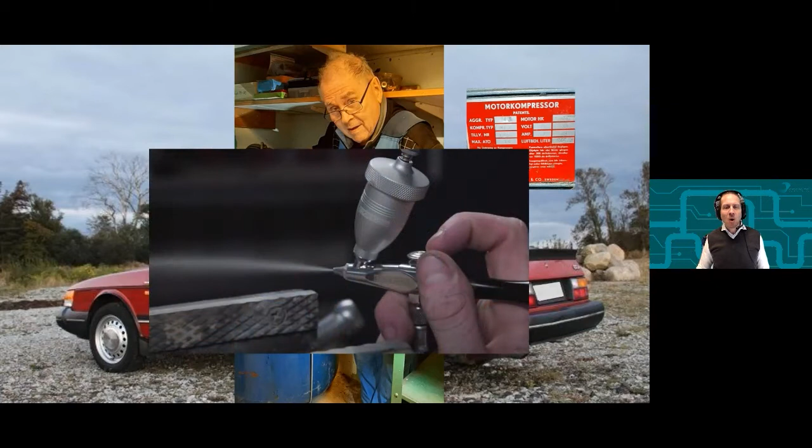My first close-up experience with a compressed air system was when our old Saab got a rust spot on one door. My crafty father-in-law happens to be an expert car mechanic, and in his garage he had a large compressor with a buffer tank that originated from a cement factory. The compressor looks dangerous and is driven by a powerful 3-phase motor that makes a terrible noise. I was amazed. Why use such a large and noisy machine for sandblasting and painting?

Running the compressor uses a lot of electrical energy. However, and this is one of the reasons why we see so many applications of compressed air, it enables using small and light tools with high precision and power.

Before I share some insights into how compressed air can be used, I want to bring you down to the tiniest details, the air molecules. Air in the Earth's atmosphere is a mixture of different gas molecules. I'm sure you've heard that - mostly nitrogen molecules, but 1/5 is actually oxygen. The molecules move around really fast, and they have an average speed of roughly 300 meters per second, about the speed of sound. But they bump into each other all the time.

Let's see what happens when air is compressed. I will use a great online tool by the University of Colorado Boulder. You'll find the link to the tool at the end of this presentation. We start with a container of air - you can imagine the red spheres to be nitrogen molecules and the blue ones oxygen. Now, if I compress the air by making the container smaller, let's see what happens.

You see that the molecules bounce more often, and this means that the pressure is rising. You can see that on the pressure gauge at the top right, which measures pressure in units of atmospheres. We see right now that the pressure is around 171 times the atmospheric pressure.

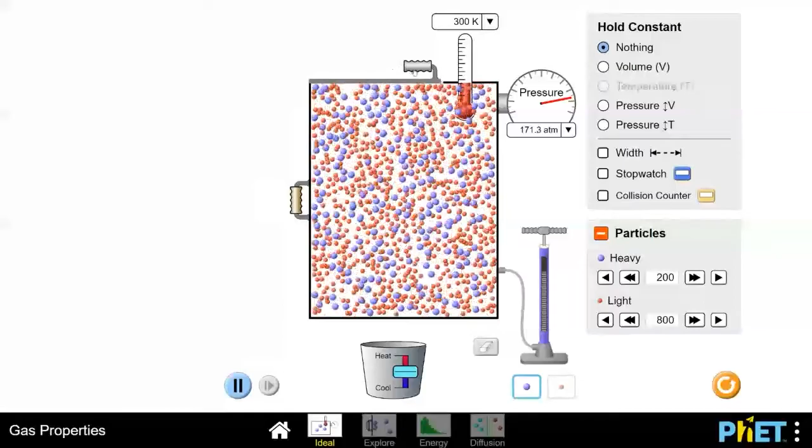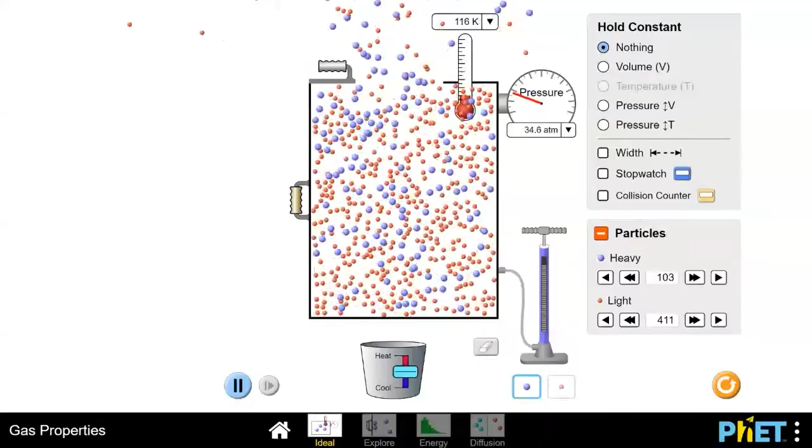If I open the lid now, the molecules eagerly leak out to the surrounding atmosphere. It is this action, the force of the molecules leaving the container, that we use in various applications of compressed air. The force of air is often used to scare people.

Do you remember Arnold Schwarzenegger's popping eyes in the movie Total Recall from 1990 when he was exposed to vacuum in space? Vacuum means that there is no air, so the air pressure is too low for the human body. But of course, even if pictures like this give us nightmares, they are not even close to describing what actually happens.

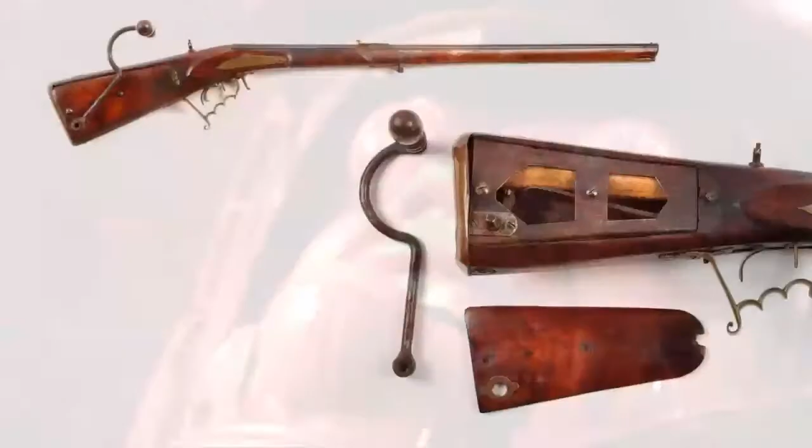However, compressed air can really kill you. The oldest mechanical compressed air gun is from the 16th century and can be seen at the museum Livrustkammaren in Stockholm here in Sweden. The gun easily was the most dangerous gun at that time, shooting darts at a speed of over 100 meters per second. It utilized a bellows mechanism that you can see in the picture here that allowed for very precise action.

So you see, compressed air can be wild, really dangerous, but contained, it can be very strong and useful. And that is why 10% of the electricity consumed by the industry today is used to generate compressed air.

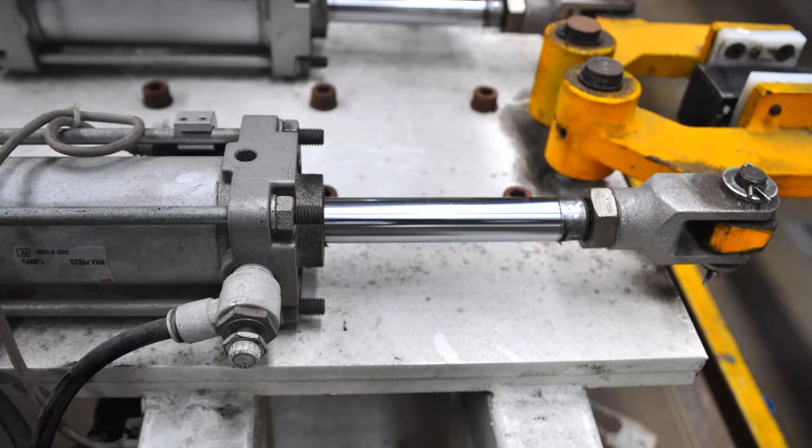Components that operate on compressed air are called pneumatics. Pneumatic cylinders are the muscles of the manufacturing industry, and devices like these can easily lift more than 100 kilograms. Pneumatics can be combined into very complex instrumentation in all kinds of industry.

However, compressed air can also be soft and caring, as in the form of breathing air supplied to people that are seriously ill. Compressed air is saving lives on a daily basis. As you will hear from Bo later, our technical director, the process of generating compressed air, however, is incredibly inefficient.

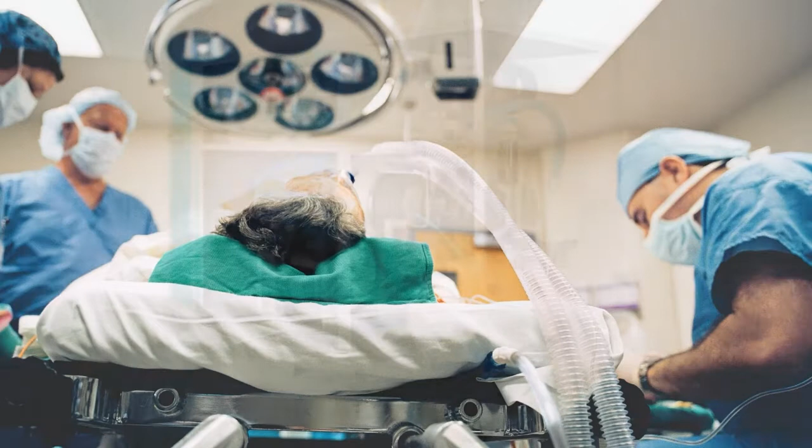So let's look at an industrial compressor. They can take many different shapes, but their basic operation is the same. They take atmospheric air and compress it into pipes that deliver air to the pneumatic machines in the factory.

I said compressing air is inefficient, and the reason is that no matter how we try, we can't compress air without raising the temperature of it. In fact, as much as 85 to 90% of the electrical energy to a compressor is lost through heat. The mechanical energy of the compressed air is only a few percent of the electrical energy that we put into the compressor.

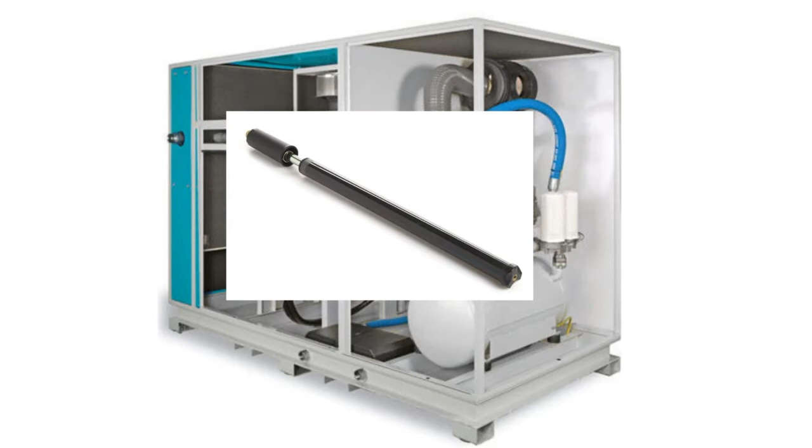Now, if you don't believe me, have you ever tried to use a cycle pump? Have you felt that it becomes hot when you pump? That is the effect I'm talking about.

Compressing air for industrial use can cause it to become several hundred degrees centigrade. And therefore, industrial compressors often have a built-in air cooling to remove some of the heat. But even if the compressed air is cooled inside the compressor, you can usually feel that pipes with compressed air are warm.

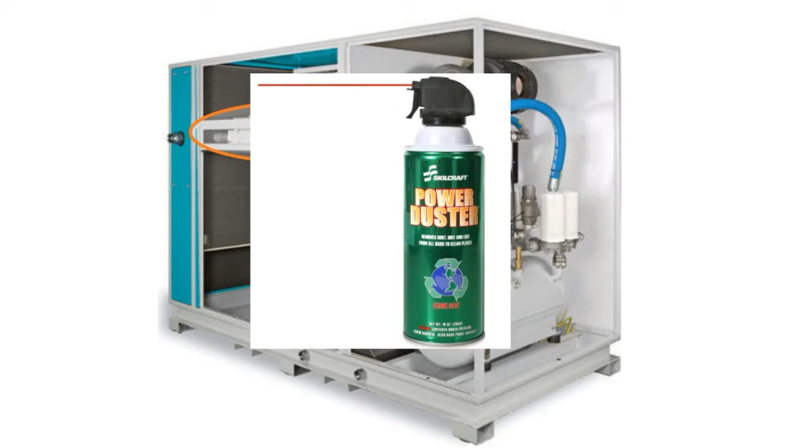Now, what if I have compressed air stored and I open a valve to let it out? Have you ever tried to use a can of compressed air? The temperature at the valve will quickly drop and can become as low as minus 150 degrees centigrade if you expand a lot of air.

So compressing air increases the temperature, expanding air reduces the temperature. And this is the reason why generating compressed air uses so much electrical energy. But still, the benefits of using compressed air wins in many applications.

We have learned that generating compressed air uses a lot of energy, and most of the energy is lost as heat. So using fossil fuel to generate electricity that in turn generates compressed air is one of the reasons why our global industry has such a large carbon footprint.

Now, I want to bring you back in time to look at some usage of compressed air that will blow your mind. Given our society's aim to become more sustainable, I think it's just a matter of time until we see some of these applications revisiting us. Compressed air in itself is sustainable, clean, and powerful.

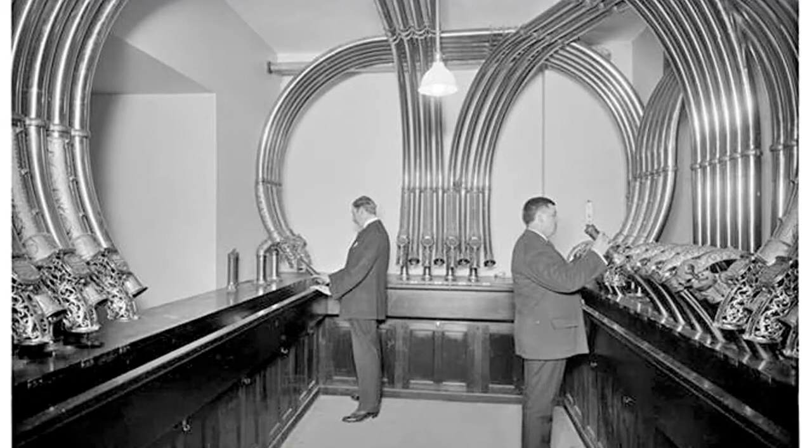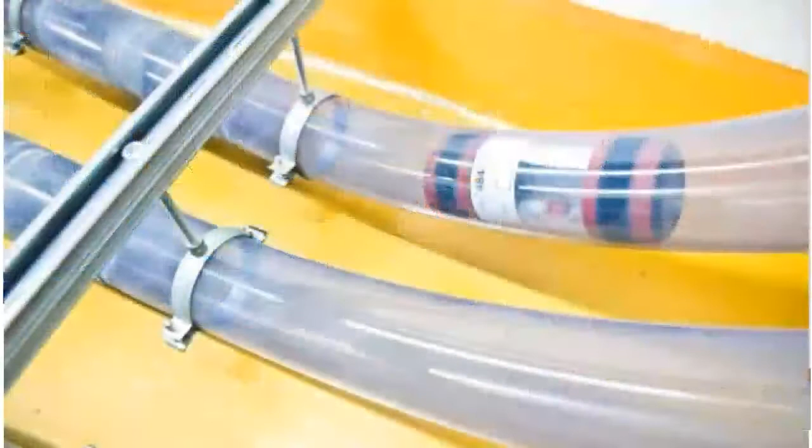The Chambers Encyclopedia from 1896 talks about pneumatic dispatch. What on earth is that? Well, you see these systems in operation today as well, often in hospitals, where they need to send blood and tissue samples with great speed. You simply put what you want to send in a capsule that is inserted into a pipe, and the capsule is pushed by means of compressed air.

Now, can you imagine that back in the 1850s already, Mr. Latimer Clark and Mr. Varley built a system to dispatch messages between the central station and the stock exchange in London? The air was compressed using steam machines, and in 1887, there were compressed air pipes with an aggregated length of 54 kilometers and compressors with a total power of 280 kilowatts used to send a staggering 86,000 dispatches per day.

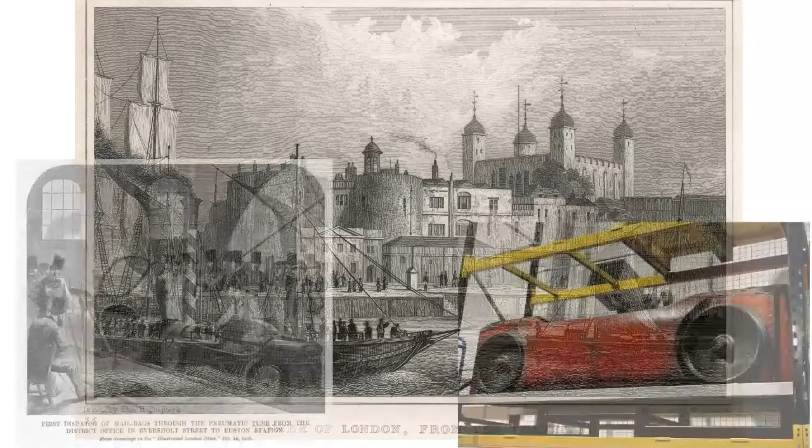In London, even large vessels like these that weighed several tons were sent by means of compressed air.

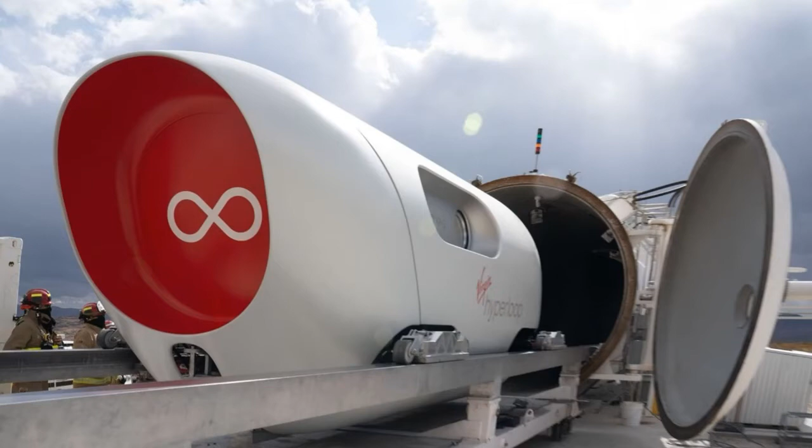And in France, a few years later, a compressed air-driven tram was inaugurated, and it operated for 30 years. They were using up to 94 trams at one time. In Switzerland, by the end of the 19th century, the city of Bern had 10 cars running on a 3-kilometer line, and the compressed air was generated by a compressor driven by water. I call that sustainable and something to think about.

Thank you, Anders. With pleasure. In this next presentation, I would like to talk about facts regarding compressed air, including CO2 emissions from generating compressed air, and the reason why compressed air is so expensive.

The carbon emissions per kilowatt hour of electricity vary from country to country. They depend on the specific fuels used to produce the energy. Countries that use a high percentage of fossil fuels for electricity production will, in general, have a higher level of carbon emissions per unit of electricity produced than those that use more renewable and nuclear energy. But no matter how the power is produced, it is routed through high voltage power lines and substations to the companies that use the power more or less sensibly, including for the production of compressed air.

This is where Enersize comes into the picture. We can often reduce electricity consumption for compressed air production, thus the costs of electricity and maintenance, and ultimately the CO2 footprint. But let's get some facts on the table.

There is a big difference between the countries in the European Union in relation to CO2 emissions, where Iceland and Sweden are at the better end, using geothermal, wind, hydro and nuclear power, but where countries with much greater use of fossil fuels have to deal with emissions in the order of 750 grams CO2 per kilowatt hour, and these data are from 2020.

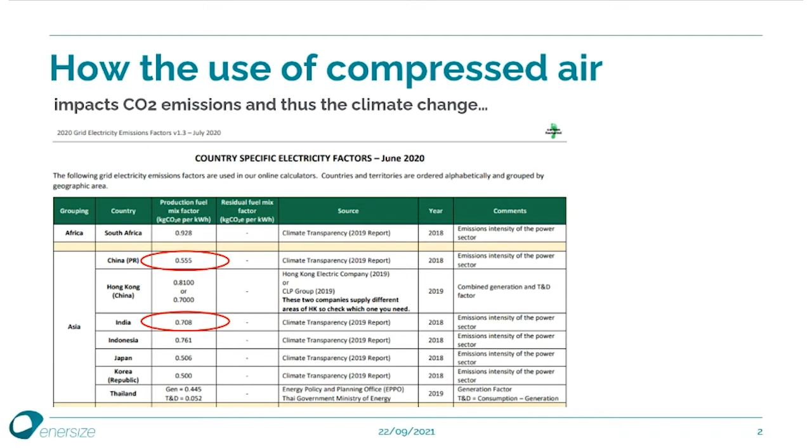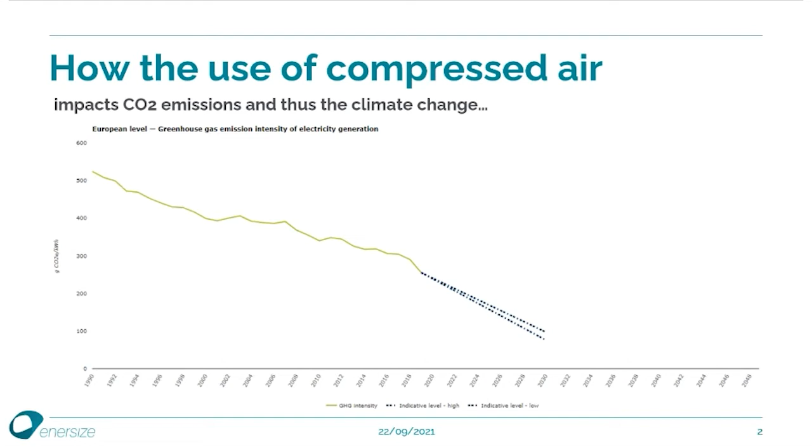In the European Union, CO2 emissions have certainly been declining in recent years, and the plan is to reduce emissions further, but it takes time. Enersize has solutions that can reduce the CO2 emissions here and now, and even with relatively short payback times, often less than a year.

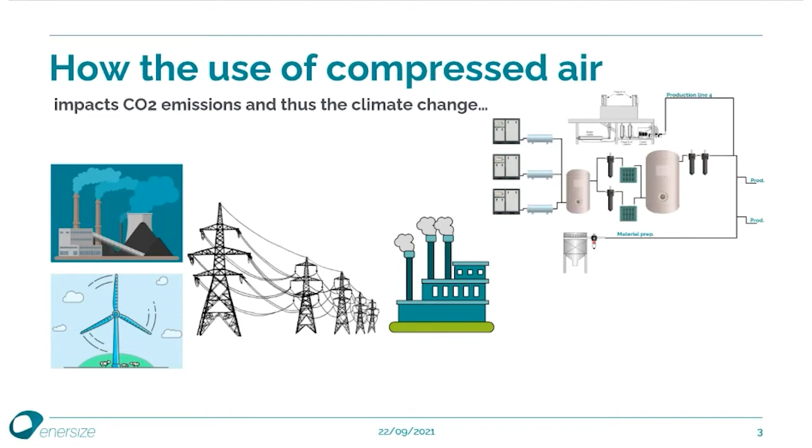Most companies, no matter what they produce, use compressed air to a greater or lesser degree. Most compressors are driven by electrical motors, and in general, it's the most expensive source of energy per unit in many companies. But of course, it has not much to do with CO2 emissions. It has to do with the fact that most of the energy supplied to the compressor turns into heat before we have energy available in the form of compressed air.

In fact, if you consume energy equivalent to 7.5 horsepower, you have 6.5 horsepower available on the compressor element shaft, but you only have about 1 horsepower available in the form of compressed air. The rest of it is heat, which, by the way, can be recovered.

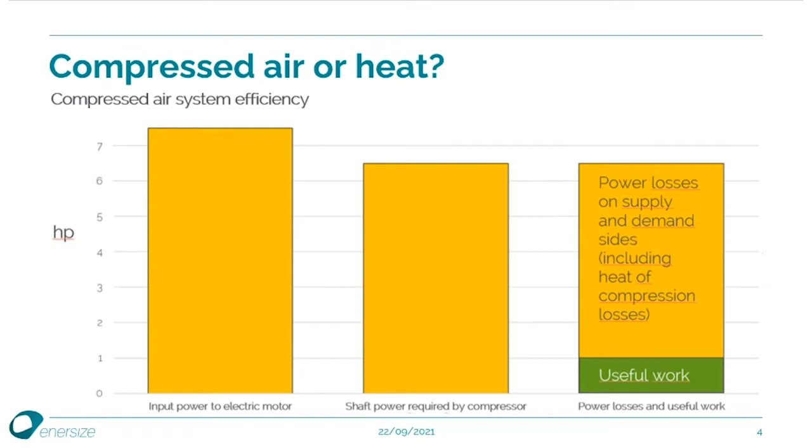But what does compressed air actually cost in terms of energy? Imagine, for example, that we are dealing with 3 compressors from Atlas Copco in the size of 160 kilowatt, where 2 are fixed-speed oil-injected compressors and 1 is oil-injected with VSD, variable speed drive.

This is the technical specifications from Atlas Copco. Allow me to correct a small printing error in the material — it must be kilowatt, not horsepower.

As can be seen, this compressor is available in 3 pressure variants: 7.5, 8.5, and 10 bar. Let's take a closer look at the 160 kilowatt 10 bar compressor. According to the specs, it can deliver 460 liter per second, corresponding to 27.6 meter cube per minute.

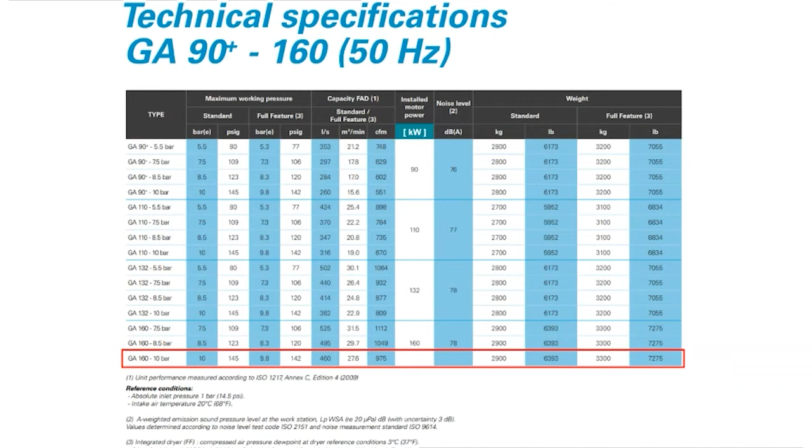But does it only use 160 kilowatt on this? Unfortunately not — this is the nominal power. The reality is that it uses some more power, in fact 178.6 kilowatt, as shown by these test data.

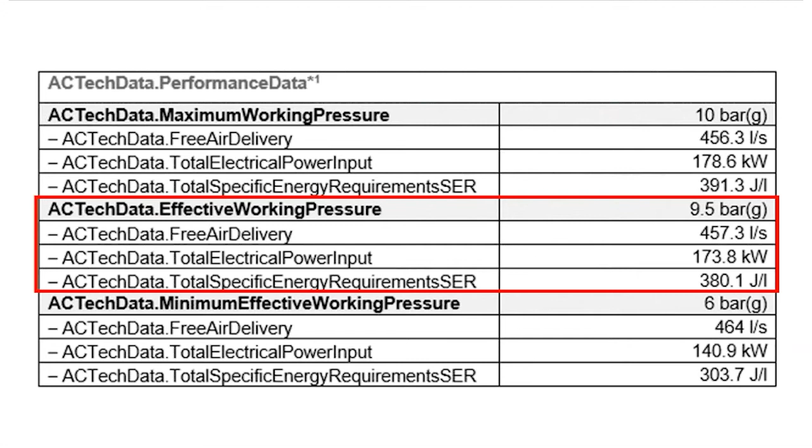But let's take a closer look at these data at, for example, 9.5 bar and pressure test them in our Enersize calculation tool.

This calculation tool uses general thermodynamic rules and thus calculates a so-called isentropic power. I start with ISO 1217, where the reference is 20 degrees Celsius and 101,325 Pascal. Then I insert data from the test data sheet, flow and pressure, and then I adjust the efficiency until I end up with a roughly similar power consumption.

This gives me a performance indicator, key performance indicator 1 and 2, which is the same indicator, just explained in two different ways.

I have similar data for the VSD variant and calculate this in the same way. As can be seen, the efficiency of this compressor is slightly lower.

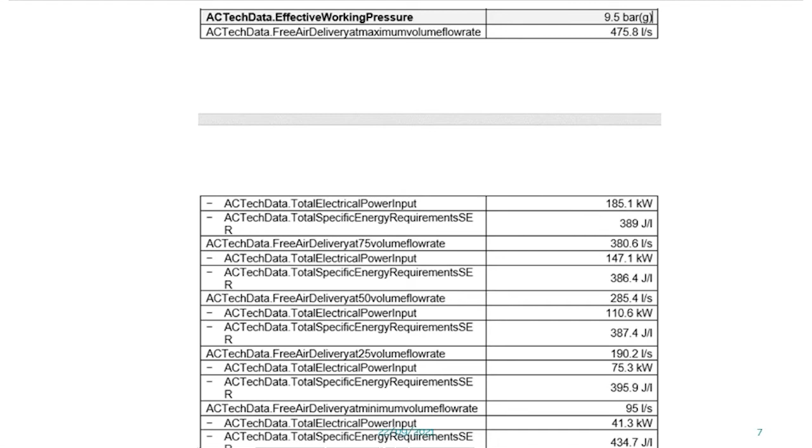This is to be expected, but at the same time, it indicates that one should try to avoid having a VSD compressor working as a full load compressor. A VSD compressor should be the first compressor in and the last out of the configuration.

Okay, let's look at key performance indicator 1. And here you see, even with a new and modern compressor, you have to pay a minimum of approximately 6.5 kilowatt per meter cube per minute if you want to operate with a pressure of 9.5 bar.

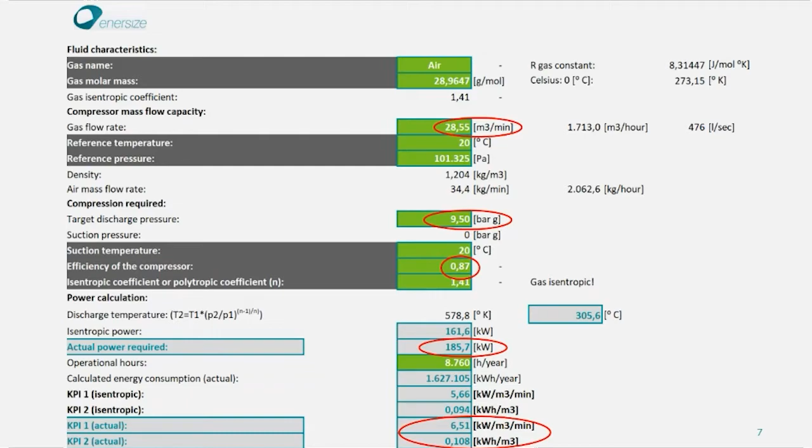Now we know the price for each meter cube per minute we want. Let's try to put this number into an imaginary example.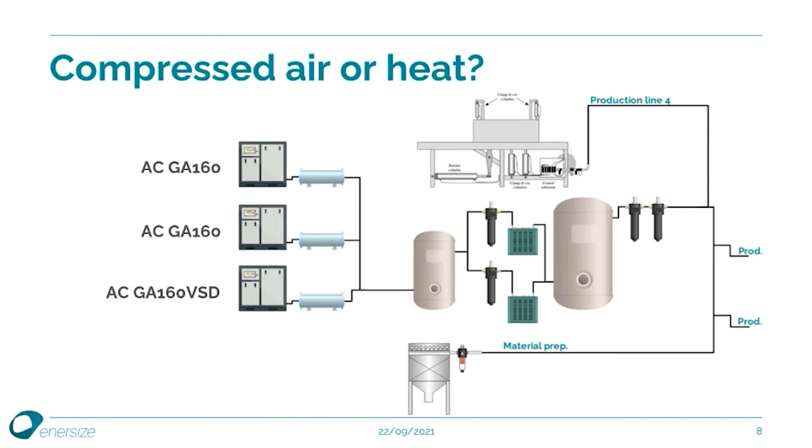Imagine you have these 3 compressors, but on average only 2 are in operation. It provides a total capacity of roughly 83 meter cube per minute, but an average daily consumption of around 56 meter cube per minute.

Also imagine that the leakage loss is 30% of the daily average consumption, which is not unusual, and that this can be reduced to 10%, which is not difficult. The operating time of the compressor system is here 8,000 hours per year.

Now we could ask, what is the saving potential? What is the payback time? And what is the CO2 reduction?

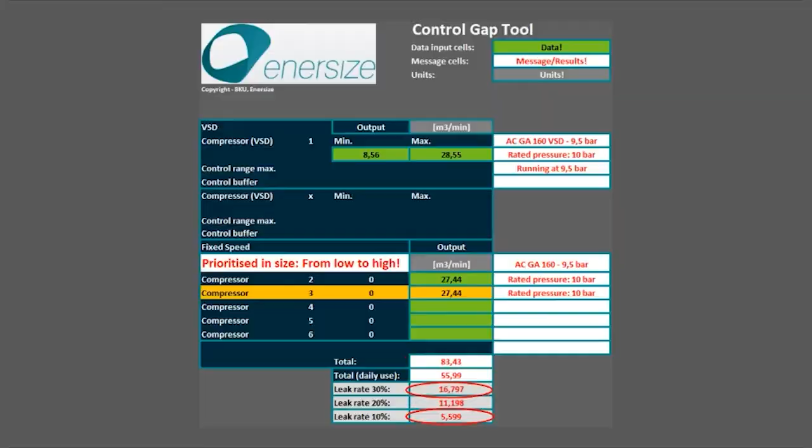Before we go and continue to some results from this little example, I will mention that there may be a phenomenon that we call control gap in this compressor configuration. But that is an area we will cover in a later webinar. So with this, a small cliffhanger.

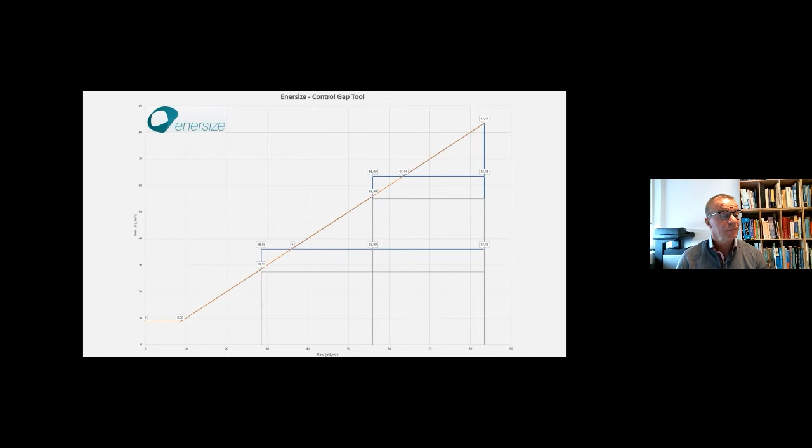What I can say now is when the blue line is above the orange, you are in a control gap area. And a control gap area is an area where 2 compressors will fight to be the trim compressor. But more about that in a later webinar.

Back to results. Allow me to highlight some of the results, such as annual electricity saving, financial saving energy only, and financial saving all included.

Something I find extremely interesting: if we project the CO2 factor for Europe by 2030, and you probably remember this number from one of the first slides in my presentation, there will still be a saving of more than 57,000 kilograms of CO2. I repeat, 57 tons of CO2 concerning this little imaginary project. And I don't think the problem of climate change will be less by that time, so why not just start right away?

Enersize has the solution. Payback, don't worry, less than a year, probably closer to half a year.

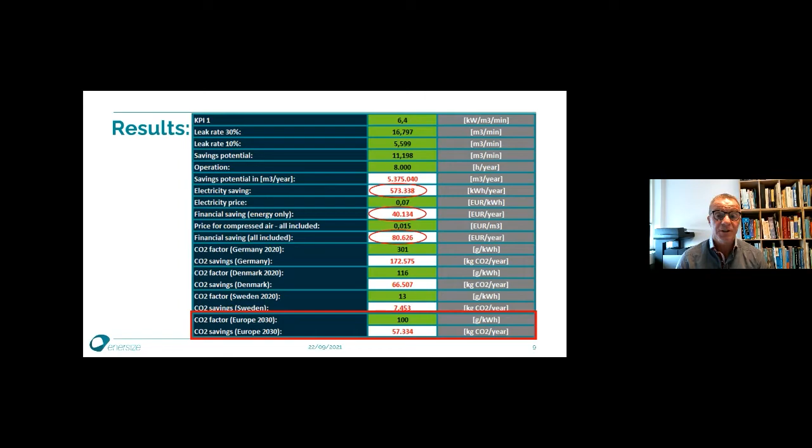I will present here the solution from Enersize. It consists of the Enersize software as a service suite for energy optimization of industrial compressed air, following Q+ LEAQS, which is software support for leakage detection and repair management; Q+ MONI, software support for continuous monitoring; Q+ Zone, software for zone-based monitoring; and finally Q+ Enterprise, software support for enterprise-wide visualization and real-time optimization.

But Q+ X-ray is the foundation of what we offer. This is what forms the basis of the entire further course. This is where we uncover the possibilities and potential for savings in your compressed air system.

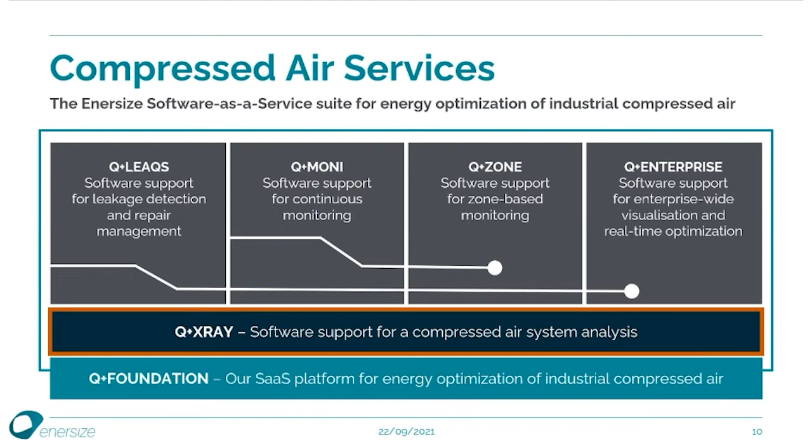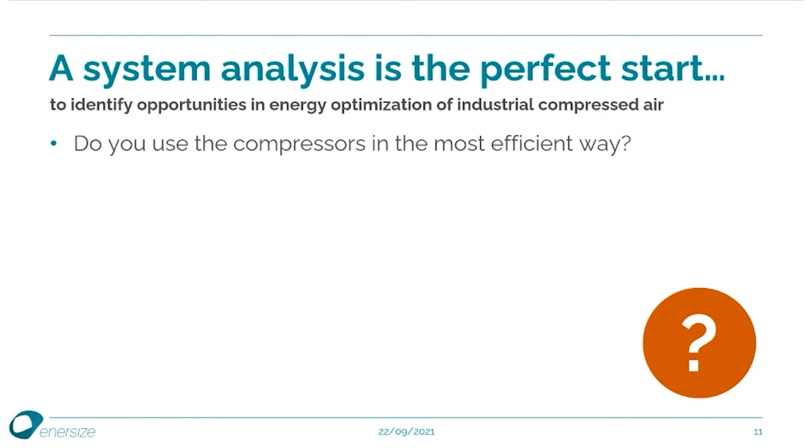Q+ X-ray is an analysis of your compressed air system, which can provide answers to the following: Do you use the compressors in the most efficient way? Does the air meet, for example, the humidity requirements? Do you use the compressors at the lowest possible pressure? Do you run the compressors with optimum coordination? Do you have any critical pressure drops in the system? Do you know how much air is consumed by leaks? And do you know the cost of your compressed air?

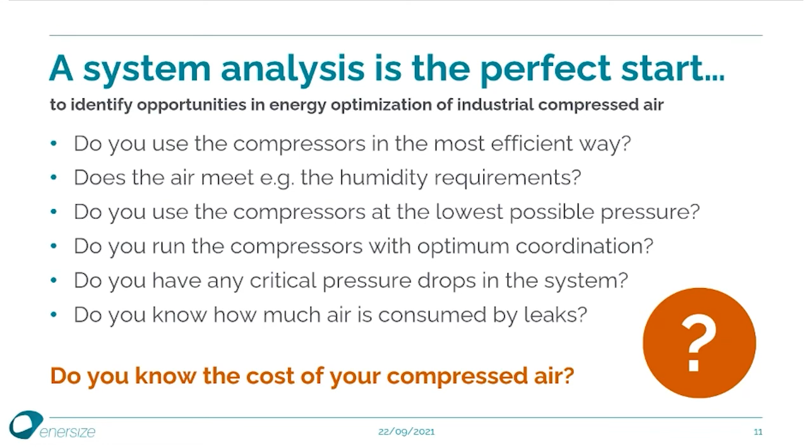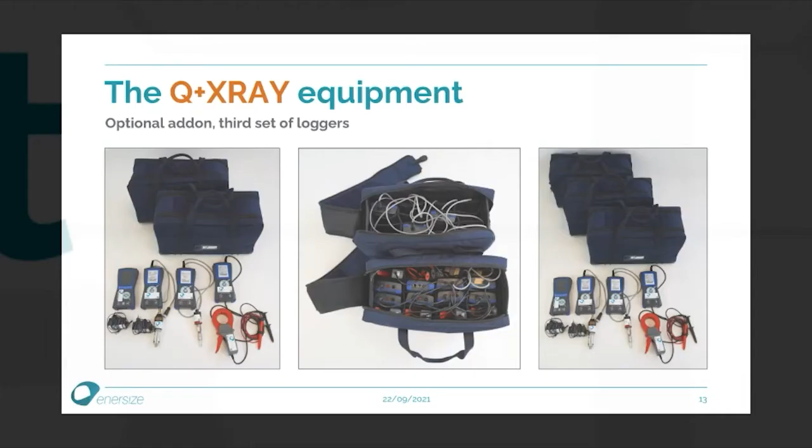At Enersize, we do not guess. We base our analysis on facts, and for this we use equipment, loggers. The pictures show a small selection of our Enersize portable data logging equipment for compressed air systems, an advanced and application-specific Q+ X-ray system product consisting of precision and high-frequency data loggers.

The data that can be logged includes pressure, temperature, dew point, and flow rate, and these data can be logged anywhere in the system. In addition, current and voltage loggers enable current, voltage, power factor, and the true power of each air compressor to be accurately logged.

The base station communicates via the internet using our cloud platform, and the loggers communicate with the base station locally using Bluetooth. This in connection with transferring Q+ X-ray information to the loggers and then uploading measured data from the loggers to the base station. The loggers are battery powered and the data sampling rate is 1 second.

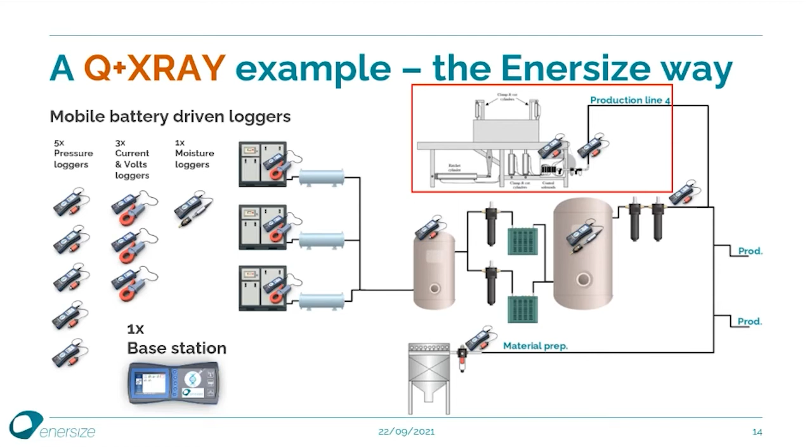Thank you very much. I now see much more clearly why there is such an opportunity to save money and carbon footprint when we do energy optimization of compressed air. Thank you, Bo. So let's look at how Enersize is developing our products to support all of this. I will hand over to Anders Sjögren again, but we will also meet Rebecca, who is leading the work at our research and development. Anders, please introduce us to what is cooking in the research and development area.

Well, I don't think you have missed the news by the Intergovernmental Panel on Climate Change, IPCC, when they in August released one of the 3 parts of the 6th assessment report on climate change. This report tells us that no matter what we do, the temperature will continue to increase for another 30 years. If we want to limit global warming to 2 degrees centigrade in the 21st century, we have to do deep reductions in carbon dioxide and other greenhouse gas emissions.

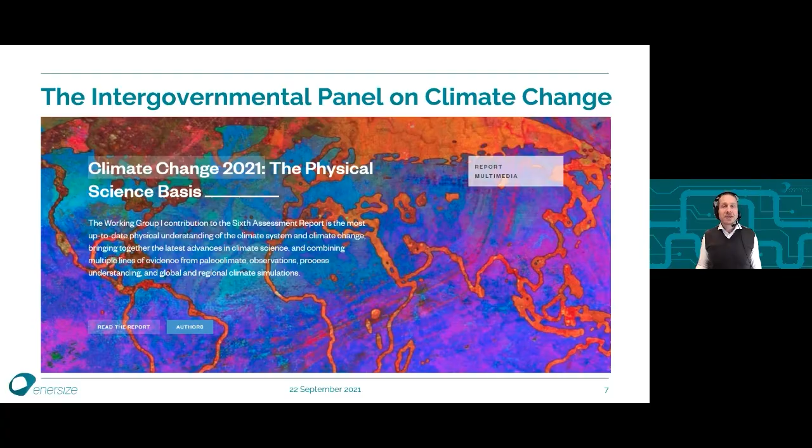Enersize is listed on Nasdaq First North in Stockholm, and we are backed by investors that rely on reports such as the one from the IPCC. To the best of our understanding, waste of energy must not continue. An investment in Enersize, whether you are a customer that buys a subscription or you are an investor that invests in shares, it is an investment in the future of our planet.

Because Enersize is part of the change that we are experiencing in society today, with an industry that starts to prioritize sustainability. Just as the climate is difficult with many aspects to consider, energy optimization of compressed air systems is complex, and that is why there has been no standardized solution available.

Enersize has identified its core and built compressed air services through 2 mergers. And we are now fully focused on standardizing energy optimization of industrial compressed air based on input from sensors in compressed air systems. And we use software because software can do analysis on big data faster and more repeatably than any human can do. And therefore we have grown our software team a lot in the last few months.

At the core of Enersize lies our investment themes that guide us to build services that are extraordinarily easy to get started with and use when you are in the industry. Our products align in an end-to-end solution for energy optimization of industrial compressed air. And we use open standards because we always prefer to simplify integration of our services into your OT and IT environments. User experience is very important when making complex services easy to use.

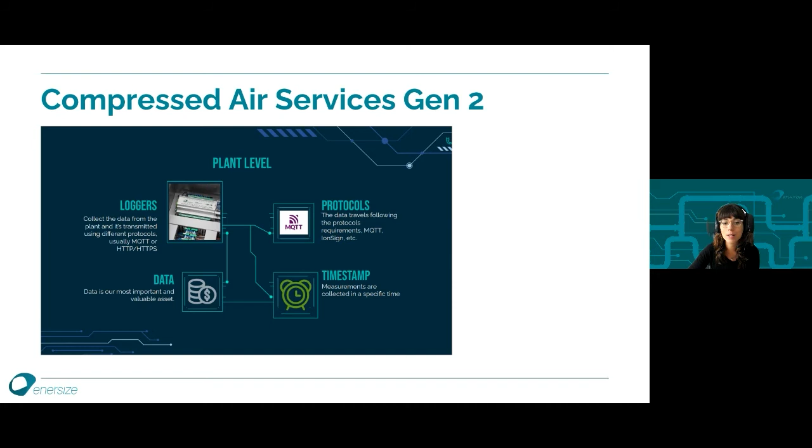Great work, Rebecca. Well, to measure is to know, said Lord Kelvin in the 19th century, and that is a statement we stand behind at Enersize. By measuring, we can gather facts, create benchmarks and standards for industrial use of compressed air, and compare sites anywhere in the world. And as Rebecca said, we want to work closely with our customers when we develop our services.

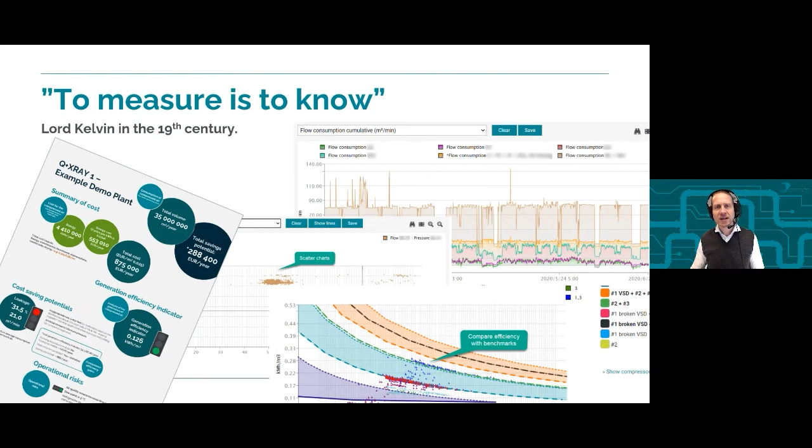You know your situation best, and it is our work to figure out how to provide suitable services. Because of this, we also started the Enersize Advisory Council with international experts and representatives from industry to guide the future development of the company.

Additionally, we invite customers to become early adopters and help us evaluate new features and functionality. Right now we are running pilot tests with a new IoT cloud gateway, aiming to bring it into full use next year with the launch of Generation 2 of compressed air services.

If you are interested in joining as an early adopter, just let us know and we will give you a really good offer, an offer you can't refuse.

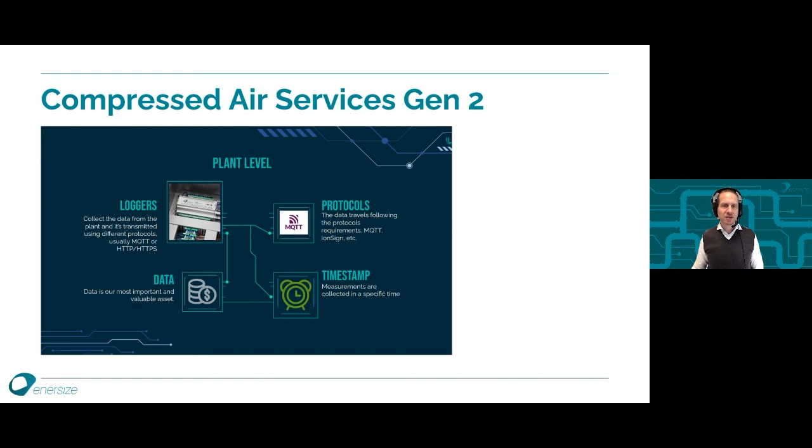Before I finish this part of the webinar, let me bring you a few highlights from Generation 2 of compressed air services. We are working to launch it next year, and we are also working on an improved user experience with a new portal for information collection that Rebecca was talking about. There will be improved alignment between the different services in our Enersize compressed air services platform.

We are working on enabling new algorithms based on big data and machine learning, and there is a new modern IoT solution coming up that easily bridges from OT to IT using open standards. And we are looking for early adopters.

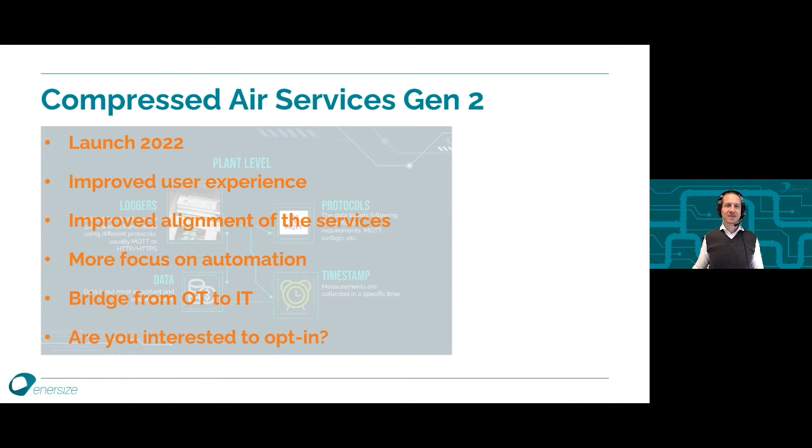So now, Anders, I know you have some upcoming Enersize activities for us. Please let us know more. Thank you very much for this update, Anders, and Rebecca, a special thanks to you.

It is very exciting to see how much is actually being built as we speak, and also to understand how important Enersize sees the engagement from customers and partners in the development work. I will now look at some of the tools available and activities coming up, looking forward, all aiming to increase interest for energy optimization of compressed air. The first area I want to highlight is the Enersize website, enersize.com.

This is a great resource for learning, for reading about customer case studies and how they experienced the energy savings, and for learning in general more about compressed air. If you do go into the site, one of my favorite areas is called the Enersize Bootcamp. This is a place where you can learn a lot about compressed air, but also find fun facts that might surprise you. When you feel ready, there's also a quiz, so you can test your skills and insights you have been building up. So please go and check the web. It's a great resource for learning.